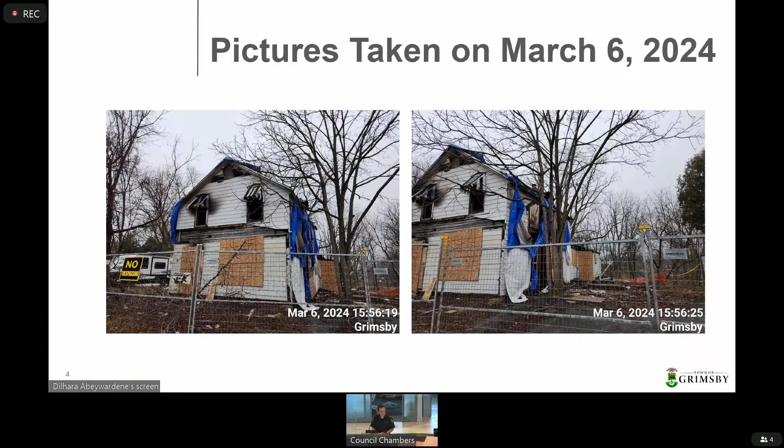On March 6, 2024, I attended 15 Robinson Street North. Upon arriving at the property, I found that the building was in a burnt and vacant condition and had been damaged by the fire. I saw several openings where someone could potentially enter the building from. As you can see, there were uncovered window openings as well as tarped off sections that could serve as access points. These photos also show the gaps in the security fencing at the property.

I found the property to be in violation of sections 3.1.1 and 5 of the Town of Grimsby's Property Standards Bylaw, No. 1517. Section 3.1.1 states that all land shall be kept clean and free from rubbish and debris and from objects or conditions that might create a health, fire, or accident hazard, including dilapidated buildings or structures.

Section 5 requires that vacant buildings are boarded up to prevent entry and that no partially or completely vacant building remains boarded up for longer than 60 days. Section 5 also requires that vacant buildings not maintained under these standards are removed from the property and the land left in a graded and level condition.

As I found the building at 15 Robinson Street North to be in violation of the Property Standards Bylaw, I decided that having the building removed from the property would best remedy the concerns. I prepared Property Standards Order No. 2024-101 for 15 Robinson Street North. The order required the property owners to remove the dilapidated and burnt structure from the land and grade to a level condition.

On March 6, 2024, I sent Property Standards Order No. 2024-101 to the 15 Robinson Street North property owners via registered mail. The property owners were given the deadline of April 10, 2024 to comply with the order.

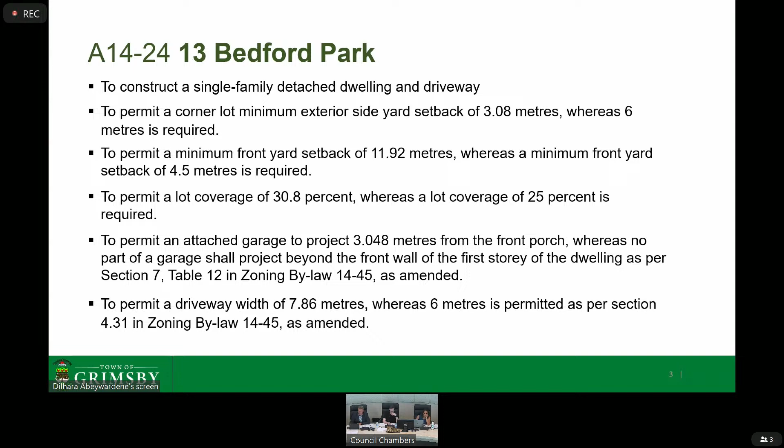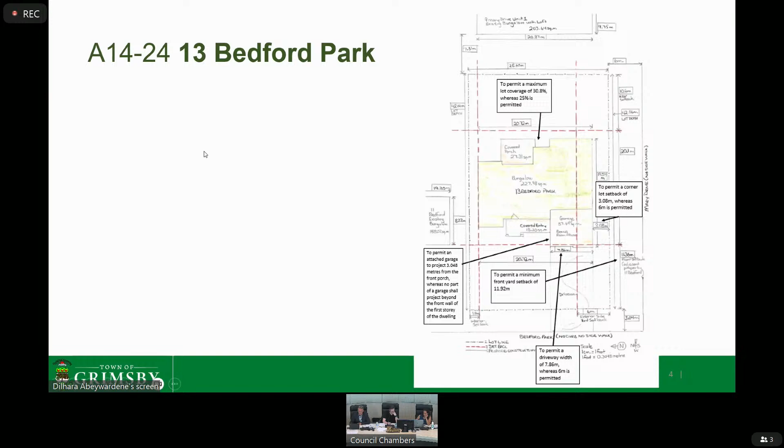Planning staff have reviewed the application and are of the opinion that the minor variance meets the intent of the official plan and zoning bylaw, is appropriate for the development of the lands, and is minor in nature. Therefore, they have no objections.

Public Works offers the following comments. If existing services are proposed to be reused, an inspection by town staff prior to connection should be scheduled to ensure the existing services meet current conditions and town standards.

They will review a lot grading and drainage plan at the time of building permit application to ensure drainage is contained within the respective lot and will not negatively impact neighboring properties, and no inherent detrimental side effects from the residential construction is to occur or affect any adjacent lands or storm sewer systems. All sediment control measures being instituted are to be erected prior to construction.

Additionally, no comments have been received from the region, NPCA, GP, Grimsby Power, or the Ministry of Transportation, as they do not have comments. And back to you, Mr. Chair.

Thank you. Is the applicant or agent here? Please come to the podium and state your name for the record.

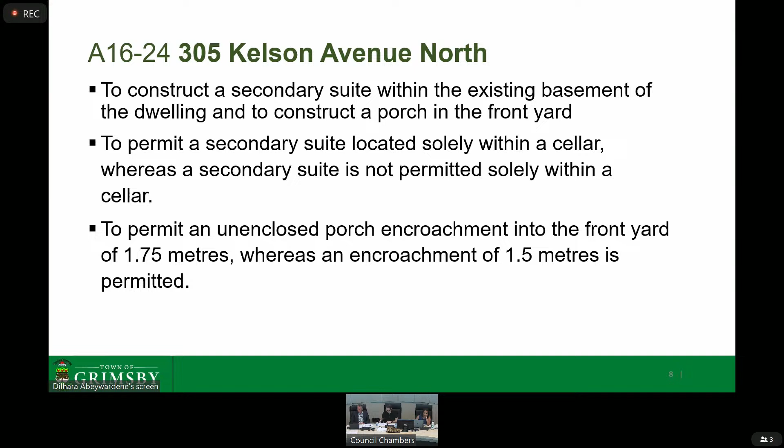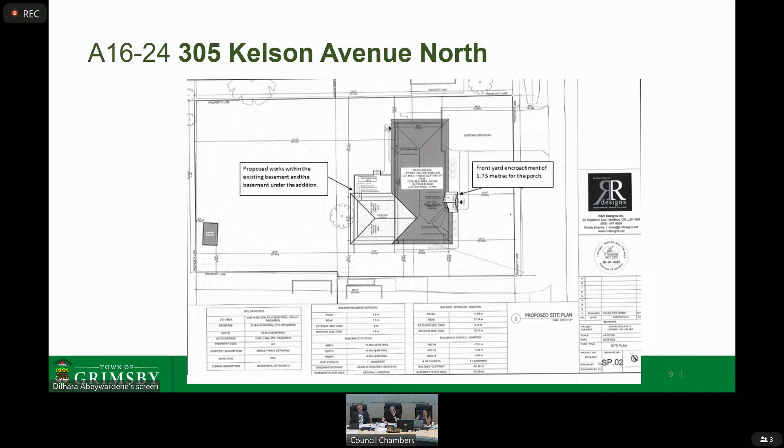This is an image of the site plan, which was circulated along with the notice, and an image of the neighborhood for context. These are the current conditions on site.

Sorry, that previous picture was what is proposed.

These are the agencies that have commented on the application, and I will summarize those comments. Planning staff have reviewed the application and are of the opinion that the minor variance meets the intent of the official plan and zoning bylaw, is appropriate for the development of the lands, and is minor in nature. Therefore, they have no objections.

Public Works staff note that even with a secondary suite to the dwelling, only one service per lot is permitted. No additional service connections will be supported, and the secondary suite will need to be serviced through the existing services to the dwelling.

The region has commented to say that the subject site is approximately 80 meters from the QEW highway. Regional staff recognize there is intervening development between the proposed development and the QEW, including a noise barrier. As such, regional staff suggest for the applicant's consideration that at the building permit stage, appropriate noise mitigation measures and building materials are implemented in the building design and construction in order to ensure that the recommended indoor sound levels of the Ministry of the Environment, Conservation and Parks guidelines is achieved, including the installation of central air conditioning so that windows can remain closed, and double-pane windows.

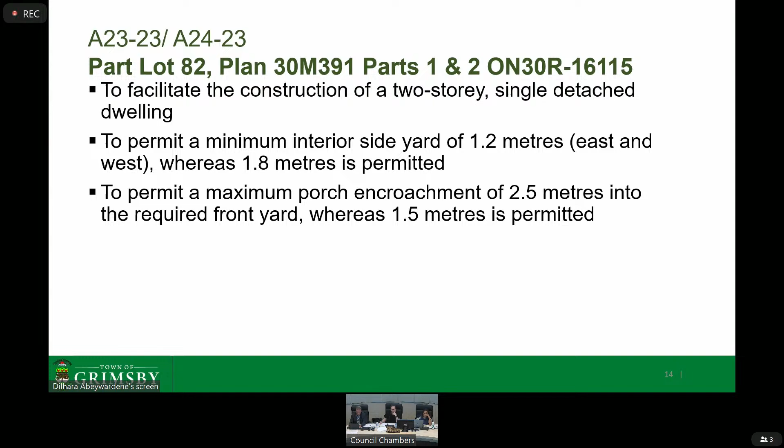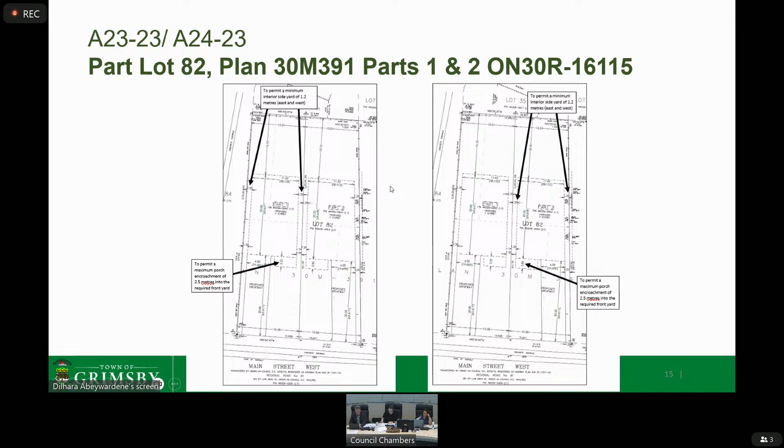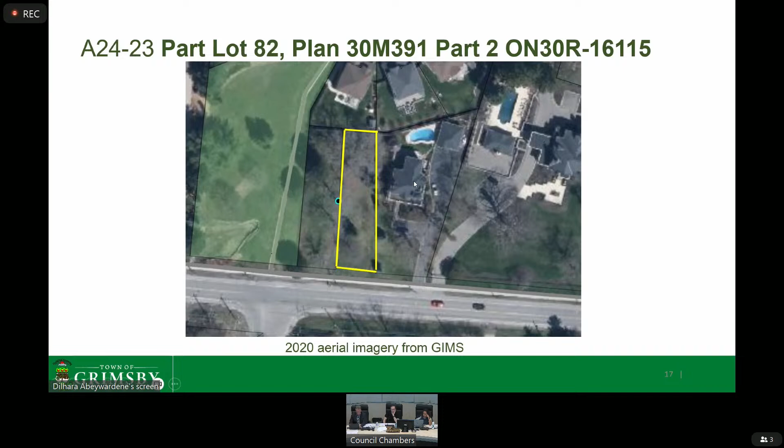These are the images of the site plans that were circulated along with the notices. This is an image of part 1, and an image of the neighborhood for context. On the other side is part 2, as you can see from the highlighted area. And these are the current conditions on site, along with an image of what is proposed for the sites.

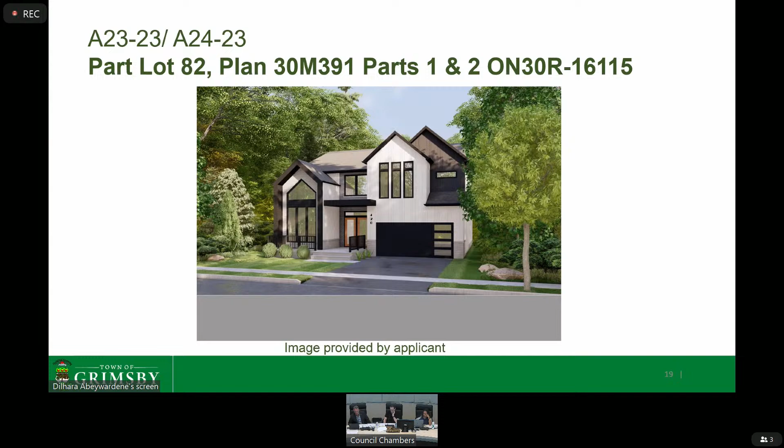And these are the agencies that have responded with comments, which I will summarize now. Planning staff have no objections, subject to one condition. They have reviewed the application and are of the opinion that the minor variances meet the intent of the official plan and zoning bylaw, are appropriate for the development of the lands, and are minor in nature.

The condition is that the location of the proposed porch be restricted to the location shown on the circulated plan, that is the site plan drawn by SS dated May 13, 2024, revision 1.

Public Works has one condition: town staff will require a lot grading and drainage plan demonstrating existing drainage patterns for the lot, at a minimum 5 meters beyond the property line. The location and direction for all proposed downspout discharge points shall be shown on the plan.

Heritage staff support the conditional approval of the application based on five conditions. Number 1: that vibration monitoring devices be added to the subject property, and that heritage staff be provided access to the monitoring devices throughout the duration of construction.

Number 2: that a construction plan be provided, and that it includes hoarding to protect the trees that are being retained on the subject property and abutting properties.

Number 3: that a stabilization strategy be prepared by an engineer ensuring that the heritage building at 326 Main Street West is not structurally impacted during construction as a result of the reduced side yard setback.

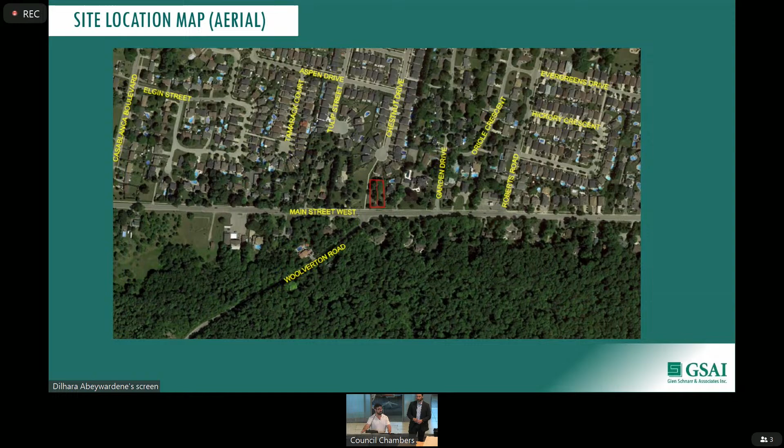If I can get the next slide, please. And again, for the record, the variances before the committee are to permit a minimum interior side yard setback of 1.2 meters on either side of the lot, whereas 1.8 meters is required, and to permit a maximum porch encroachment of 2.5 meters into the front yard, whereas 1.5 meters is permitted. If I can get the next slide, please.

This committee may remember that these applications were previously deferred from a November 2023 hearing, and at that time Town Heritage staff had identified some concerns with the November 2023 proposal, which at that time included a variance to seek a reduction in the front yard setback from 20 meters, which is the zoning bylaw permission, to 16 meters. Following that deferral, Lizani Homes has been working with planning and heritage staff to address staff's comments on the previous application.

The application before the committee no longer seeks that reduction to the front yard setback, but has again been amended to allow for a minor increase in the allowable front yard porch encroachment. The adjustment to the proposal, coupled with the conditions noted in the staff report, in my opinion, allow for an appropriate and compatible development while maintaining the character of Main Street. And if I can get a slide, please.

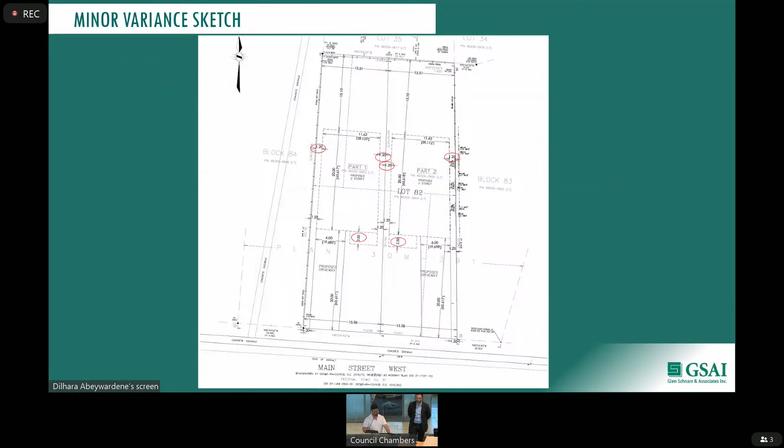I agree with staff's analysis of the four tests, being that the proposal maintains the general intent of the official plan and the zoning bylaw, that the proposal is minor in nature, and the proposal is desirable for the development of the lands. And Mr. Chair, those are my submissions. I do want to recognize the neighbors' comments. I did not see the letter prior to today's meeting, so I appreciate the Secretary Treasurer noting it.

I'll just make a note that there were some concerns regarding the front yard setback and lot coverage. The only variances before committee today speak to side yard setbacks and allowing for a minor increase in the porch projection. All other zoning permissions with regards to lot coverage, rear yard, front yard setbacks, and building height will be maintained through these applications.

Okay, thank you very much. Any questions from the committee on either of these applications?

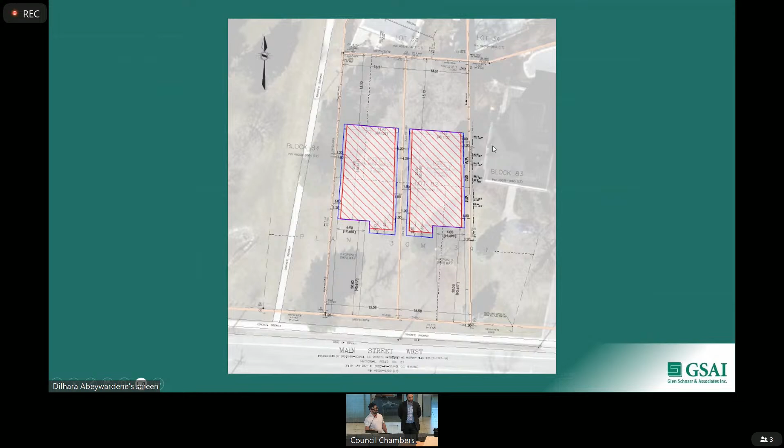No questions, Mr. Chair, but I do have some comments. I know the severance came before this committee a couple of years ago—I don't know if it was this committee or the previous one that dealt with it. There was significant opposition at the time to creating two lots instead of maintaining one, given the character of the neighborhood, the Main Street character of lot sizes and frontages, and so on.

So against the wish of the committee, they turned it down, and I think they went to the OLT to get their severance. There was significant opposition from the neighbor, a few others, and a former councillor who dealt with the subdivision. I'm still against this variance because, again, it proves it wasn't really meant to be two lots. They still need variances, and I can't support it. Although I think it's minor, it doesn't meet the other three tests—being appropriate for the development use of the property, or being desirable for the development of the land. So that's just my comments on this one, based on the history of it.

Okay, thank you. Do you want to respond to the comments? I would like to respond, and I hope I can get some comments from staff as well, who wrote a supportive report for the application before you. I don't have to provide the history, but if we can just rewind to that OLT discussion—this lot is about 30 meters in width and 1,600 square meters in area before consent.

The zoning bylaw says that each lot in this zone can be 15 meters wide and 800 square meters in area. The zoning bylaw recognizes that that piece of land at that time could be divided in half into two equal parts. At that time, we didn't request any variances for lot area or lot width. We had the full support of staff.

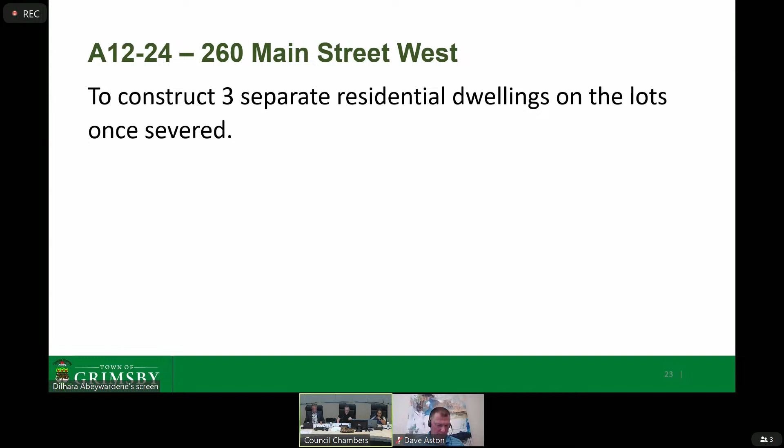These are the variances requested. For Lot 1, to permit a maximum lot coverage of 45%, whereas 15% is required. To permit a minimum lot frontage of 4.1 meters, whereas 18 meters is required. To permit a maximum front yard setback of 42.1 meters, whereas 12 meters is required. To permit a minimum interior side yard of 1.2 meters, whereas 1.8 meters is required, and to permit a minimum rear yard setback of 7.5 meters, whereas 25% of the depth of the lot, or 20 meters, is required.

Variances for Lot 2: to permit a maximum lot coverage of 45%, whereas 15% is required. To permit a minimum lot frontage of 4.1 meters, whereas 18 meters is required. To permit a maximum front yard setback of 38.9 meters, whereas 12 meters is required. To permit a minimum interior side yard of 1.2 meters, whereas 1.8 meters is required. And to permit a minimum rear yard setback of 7.5 meters, whereas 25% of the depth of the lot, or 20 meters, is required.

The variances for Lot 3: to permit a maximum lot coverage of 45%, whereas 15% is required. To permit a minimum interior side yard of 1.2 meters, whereas 1.8 meters is required. And to permit a minimum rear yard setback of 7.5 meters, whereas 25% of the depth of the lot, or 20 meters, is required.

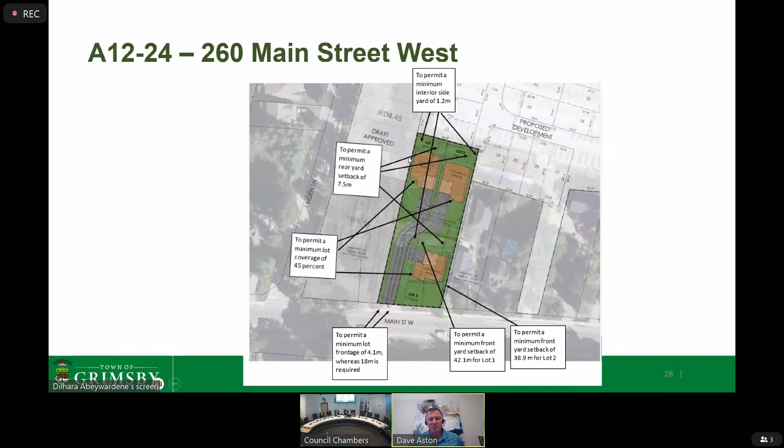As a starting point, one of the things we wanted to add as additional information is what's happening in the area. As we mentioned at the last meeting, the lands to the east, lands to the west were draft approved, and there's additional lots. Lands to the north of the site are subject to a planning application with the town now for a zone change and plan a subdivision, plan a condominium.

So you can see what's happening in the areas, that there's been approvals for development in the area. A couple of things I want to point out relative to what's being proposed with the lots on the subject lands is the lots in the proposed development are 10 meters by about 28 meters, so those lots that are to the north and to the west are actually quite smaller than what's being proposed for the lots on the subject lands.

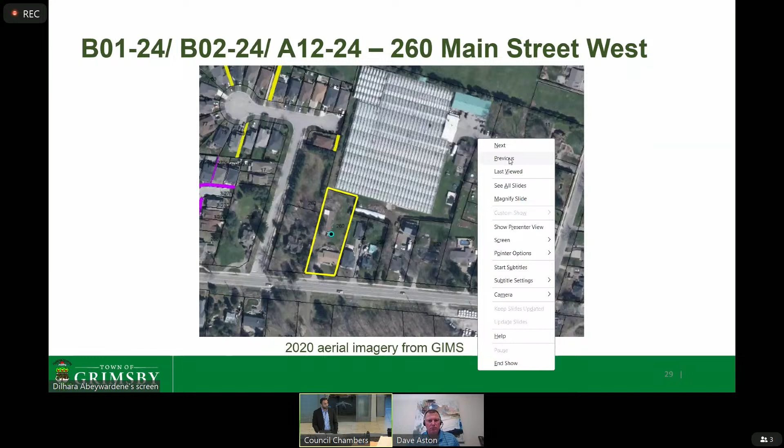So the home or lot proposed closest to Main Street is set back about 2.4 meters from that shared property line, close to where the neighboring dwelling is. The two homes in the back, lots 1 and 2, are set back even further than that home. And the structure behind sits near our neighbor's property to the east.

So not affecting the enjoyment of those lands. There is existing vegetation along that shared property line. I think it would be appropriate to provide screening along that shared property line so there isn't adverse impact or overlooking views. Our intent is to create a community appropriate for everyone, the people buying and the people who live there currently.

I think what you're seeing currently on the land is going to be reflective of what could be developed and what we're requesting to be approved. And I think those two homes in the back provide minimal impact to the neighbors on the east.

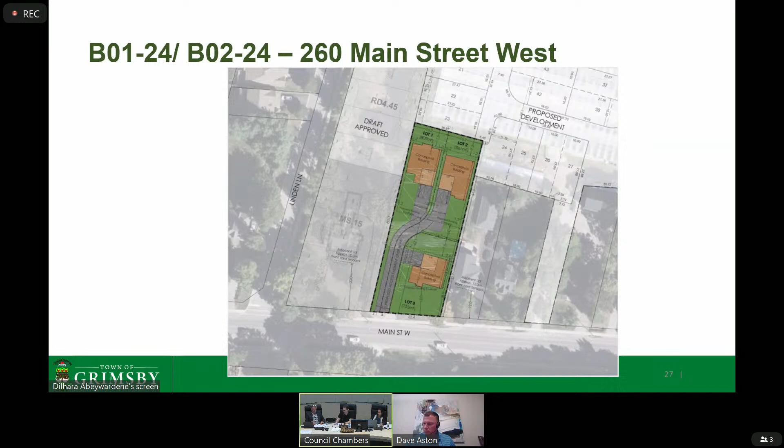Okay, thank you. So we have the two consent applications and the minor variance application before us. As the committee, someone want to make a motion? I don't know how they want to handle it, if they want to handle it as a package or individually. Sorry, you want to speak again?

I just want to reiterate, for what it's worth, that the application before you today does have the recommended approval of the region for meeting provincial policy and their official plan, as well as the town recommendation for meeting the official plan, and meeting the 4 tests associated with a minor variance application.

We've worked hard with staff to get to this point. This is not something that was just sprung onto staff. It was something that we've had multiple meetings with in order to get to this point. And so we endeavor to continue working with staff to fulfill those conditions and to permit a compatible form of development for the community and for our neighbors. That is our goal, that is our objective with this development. Those are my submissions to you.